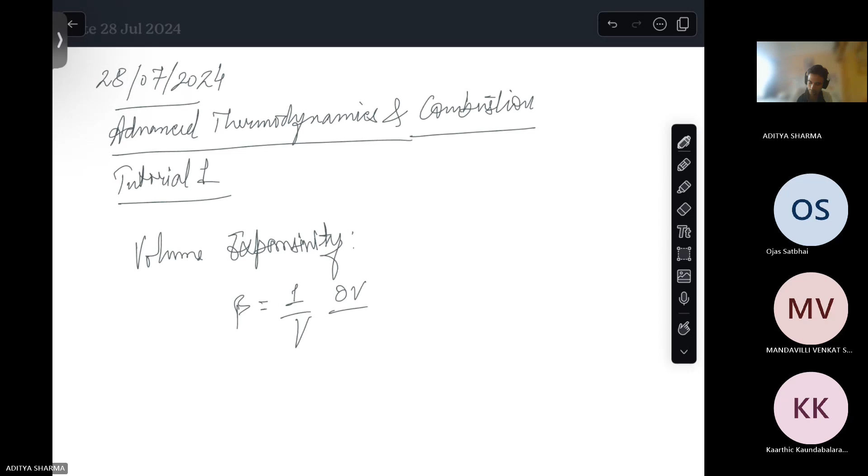Then along with the hydrostatic system, we discussed a few other topics like what is volume expansivity. The numerical formula for volume expansivity relates to, at constant pressure, the change in volume with the change in temperature.

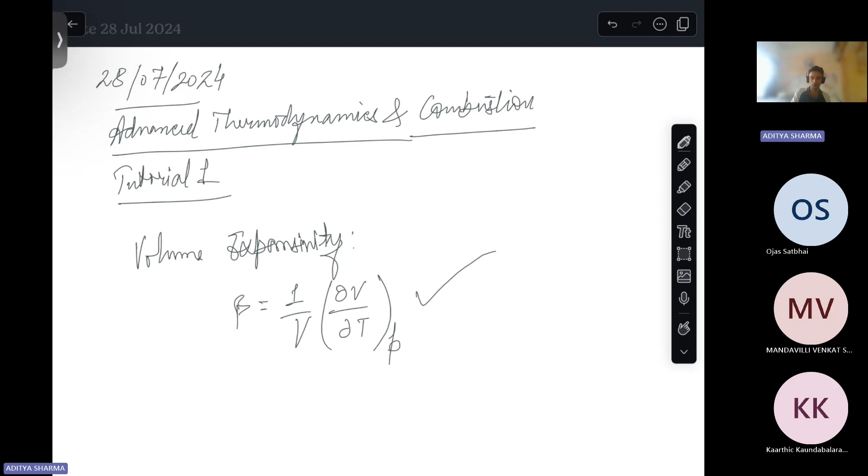So this is the formula for volume expansivity. Then there is isothermal bulk modulus and isothermal compressibility. All this has been discussed, but I'll just write down the formula for isothermal bulk modulus.

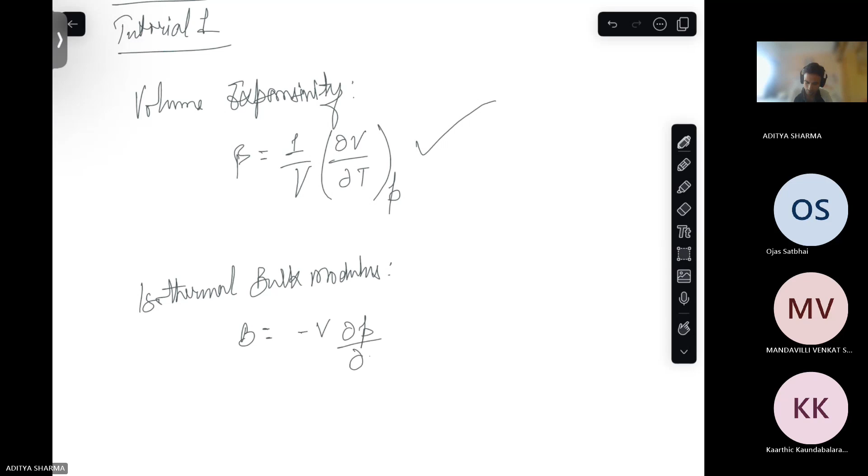And the inverse of this is isothermal compressibility. Conceptually, it has been well discussed in the lecture, so I won't take time on that. But so we have some context of all these topics, I'm just briefly discussing them.

And then there's some relation between volume expansivity and isothermal compressibility. This has been discussed in this particular topic.

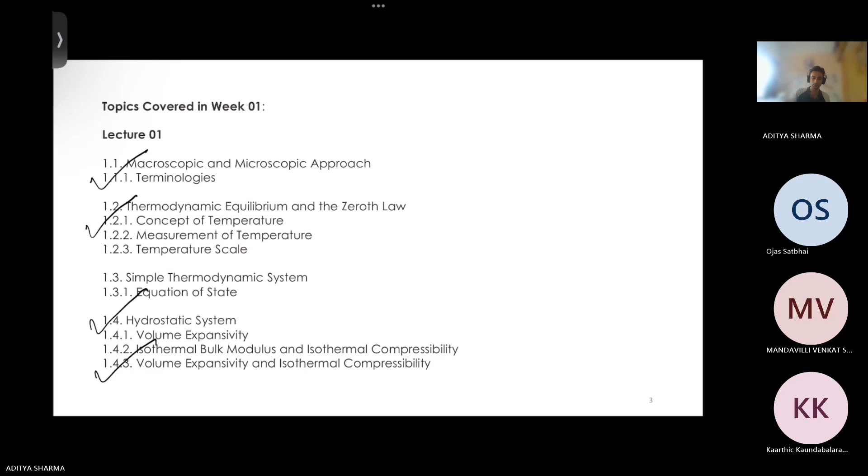So this was about lecture 1, and in lecture 2 we introduced work and heat transfer. What is work and what is heat? This has been discussed and introduced in this lecture.

In the previous lecture, we discussed what a hydrostatic system is, and here we introduced one more term, that is quasi-static. So what is a quasi-static process, and along with that, how we consider work transfer with quasi-static processes. This has been discussed in this topic.

So for a process to be quasi-static, the lectures say that the system has to be in thermodynamic equilibrium. And for thermodynamic equilibrium, it has to be in mechanical equilibrium and chemical equilibrium also. The content of the lecture says this.

Then we saw a pressure volume diagram. So as far as thermodynamics is concerned, PV diagrams are very important. Through PV diagrams, we can discuss the work involved in a particular process, because the area of PV diagrams gives us work.

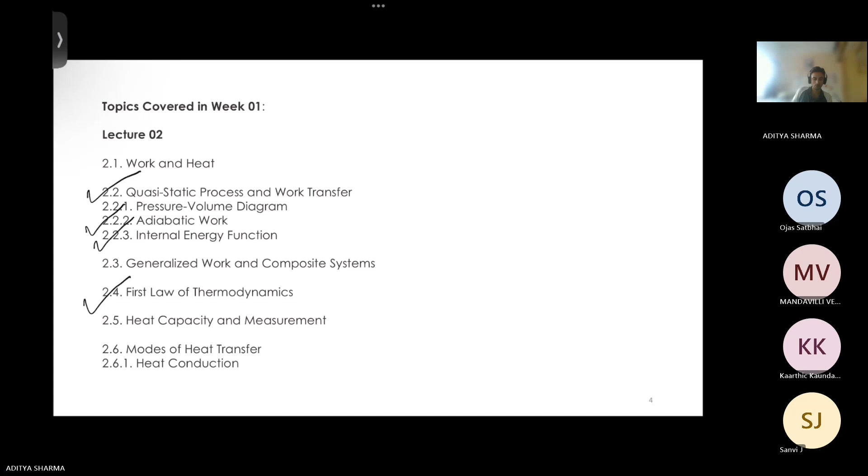As the name suggests, it's the capacity for heat. So if a system is receiving some heat, what is the capacity of that system to gain heat? And that we define using different heat capacities, or should I say two terms: specific heat at constant pressure and specific heat at constant volume. So these heat capacities have been discussed.

And then at the end of this lecture, modes of heat transfer have been discussed - three modes of heat transfer. One is conduction, then there is convection, after that there is radiation. So these three modes of heat transfer have been discussed.

Heat conduction is governed by Fourier's law, and then we have heat convection, and then at the end we have radiation, in which Kirchhoff's law and Stefan-Boltzmann law, these two laws have been discussed and introduced. So this is about lecture two.

Then we have the last lecture of this particular week. So here we started with the conversion of heat and work. How heat can be converted into work and work can be converted into heat is the whole theme of this particular lecture.

In the starting slides, we saw that how work can be purely converted into heat, but vice versa is not possible. And then for that, we introduced the second law of thermodynamics. The statements of second law of thermodynamics state that if we want to get work out of heat, then it is not possible to convert 100% of heat into work.

So for heat engines, there is a Kelvin-Planck statement, and then for refrigerators, there is a Clausius statement. All these statements we have studied in plus one and plus two standard also. And then after these statements, there are inferences out of these statements that have been discussed in this particular lecture.

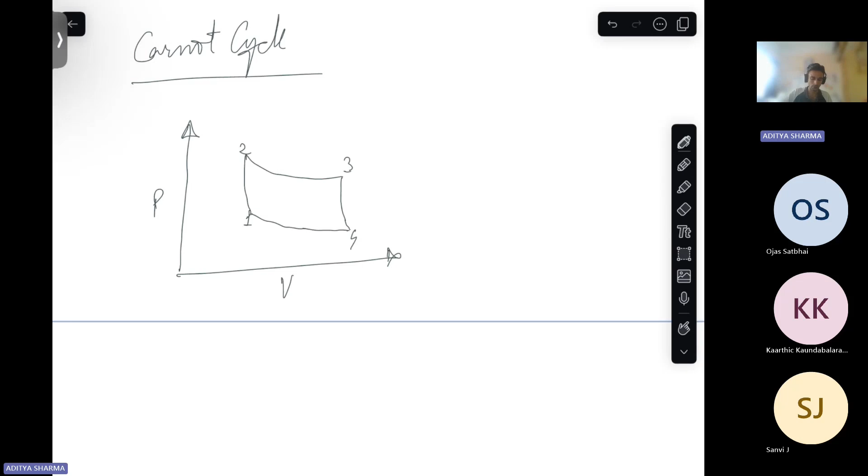So this is our Carnot cycle, right? So in this, 1 to 2 is adiabatic compression. Then this is isothermal heat addition. Then this is also adiabatic expansion, and here is isothermal heat rejection, 4 to 1. So this is our basic Carnot cycle.

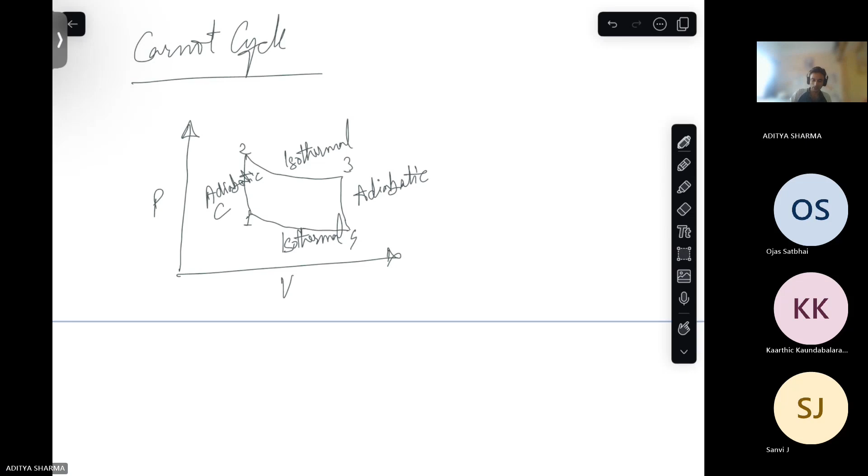So we have discussed this in this particular topic of Carnot cycle. After that, we move on to the next topic, that is thermodynamic temperature scale. So here, what we see is that in the zeroth law of thermodynamics, we introduce the concept of temperature. But there we were not quantifying the temperature, though we discussed how temperature is measured and the different scales. But as far as the quantitative element of temperature is concerned, this comes from the second law of thermodynamics, as the content of your lecture 3 also says.

So here, when we discuss Carnot efficiency, we see that the Carnot efficiency essentially depends on temperature only. And from that, we come into this quantitative part of temperature, and this way we define thermodynamic temperature scale. And then there are different temperature scales, as we all know, some very basic and common, like Celsius, Fahrenheit, Rankine, and one more is there, Kelvin. So all this has been discussed in this particular week.

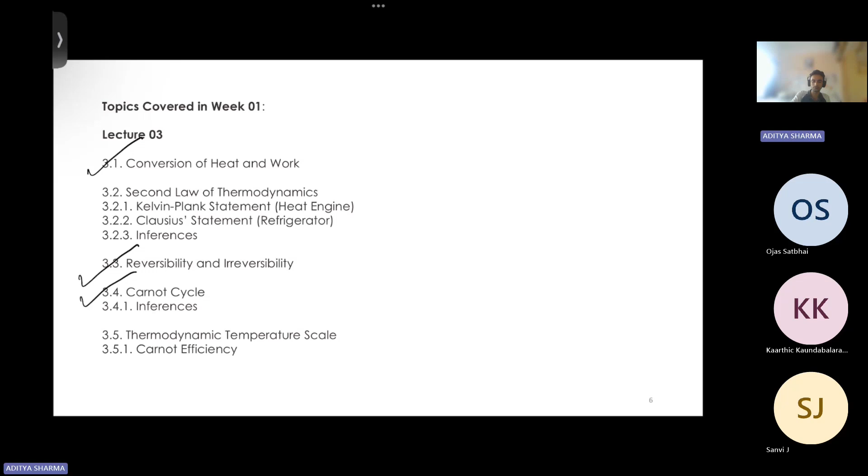So what I do is, along with the question, I also mention the topic from where this particular question comes, and then we discuss the question as far as possible. So first question is on macroscopic and microscopic approach. These are some questions that will be very straightforward and basic, but the idea is also to revise the content covered in the lectures. Along with that, you might also find some questions that you feel are good questions. And at the end, there are numerical questions on the same line as given in your assignments, so that will prove handy to solve your assignments. I have a couple of conceptual questions, but if time doesn't allow, we will skip some and do our numerical questions in the last 20 minutes. We have three numerical questions, but conceptual questions are a lot, so we will see how it goes.

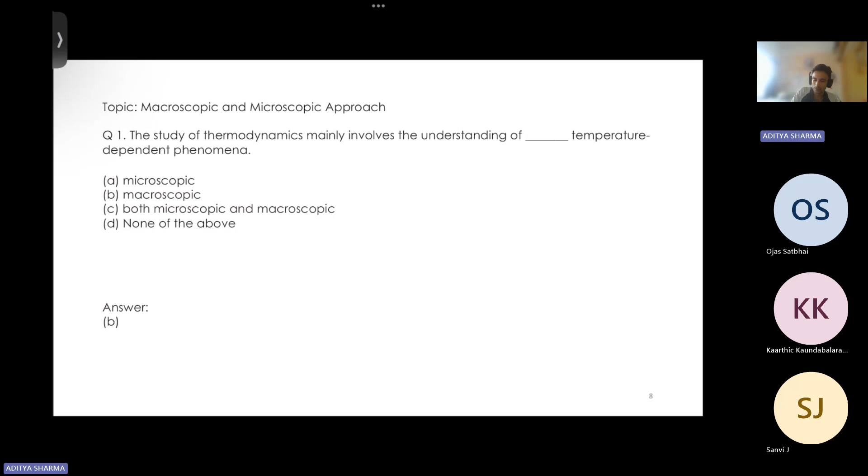Yes, any answer please? Otherwise, I'll discuss this question. Okay, Sanvi says false.

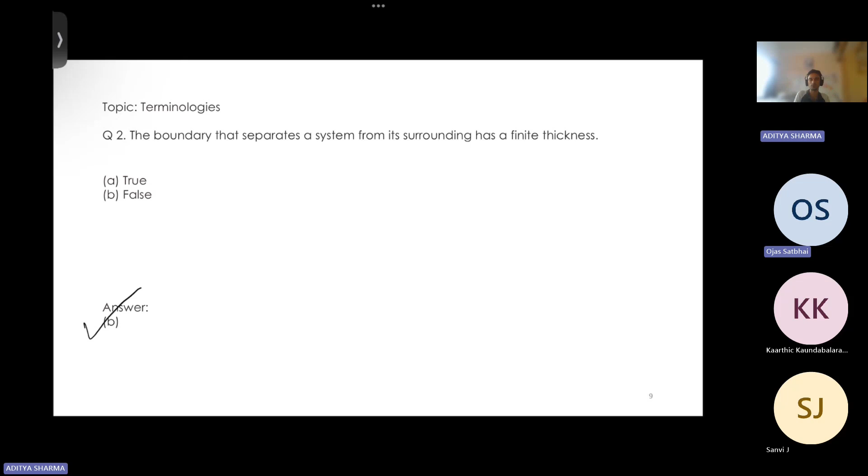Yes, I admire your suggestion, and I also respect it. You have told that you are a teacher, and I keep very high regard for you, sir. But the scheme under which I am conducting these tutorials, I also have to record these sessions, so logistically I believe that may be too much for me to float a form. Aditya, it's fine, perfectly fine, you can carry on, it's just a suggestion. Even if it is discussed, that is completely fine due to the logistics issues and our requirements. Since it is on the MS platform, these forms are available, but it is fine, you don't have to give any explanation, it's just a suggestion. I don't intend to criticize or say something, I take it very positively. But this session is also new for me, so for the safer side I'm saying logistically whether it will be feasible. It is not very straightforward, though with MS Forms in the same Teams meeting, forms are freely available, so it should not be a big thing. Right now I'm feeling that since the course suggests it is advanced thermodynamics, many participants are expecting some advanced treatment, but actually this is the first course, first week, so that's why all these questions. Sure, sure, please carry on. Thank you - in the coming weeks, topics on combustion and exergy will all be covered, but I do take your suggestions very positively. If I'm able to do that, I'll surely do that, but in case I'm not able to, it's perfectly fine, no problem, please don't mind. Thank you.

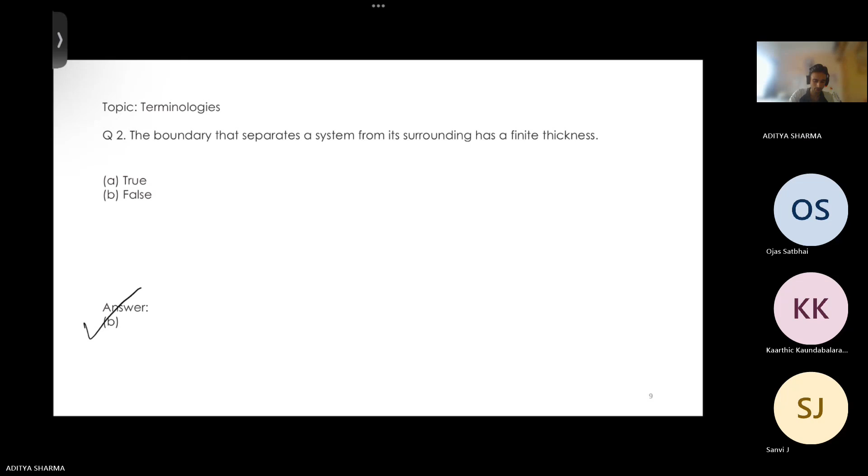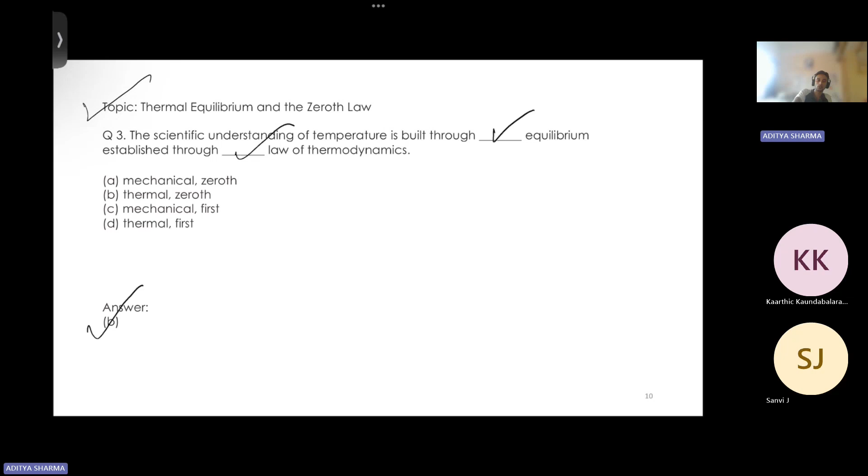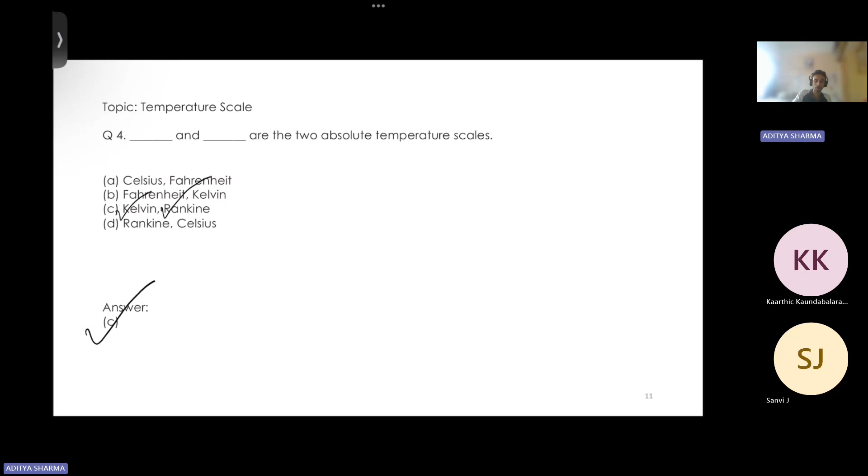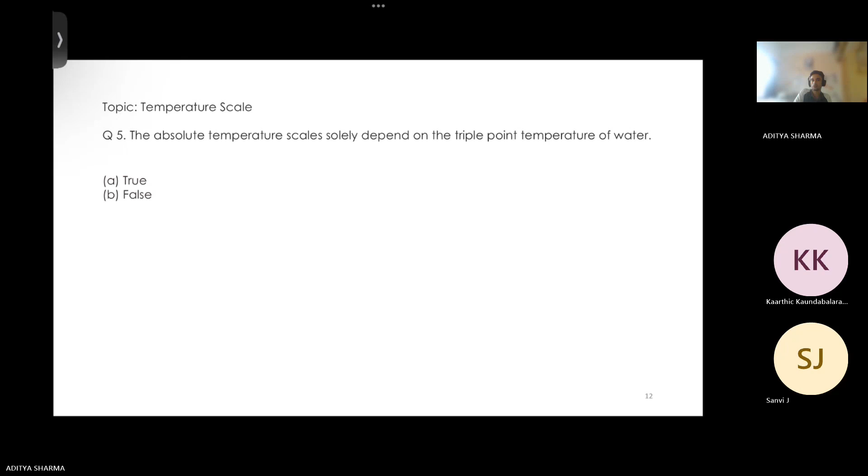If we have to define some absolute scale for temperature, like the Kelvin scale or the Rankine scale, we can do that just through the triple point temperature of water. Through this particular temperature point, we can define our absolute temperature scale. In the case of the Kelvin scale, the triple point is at 273.16 Kelvin, which is 0.01 degrees Celsius. And in the case of Rankine, that is 459.67 degrees R.

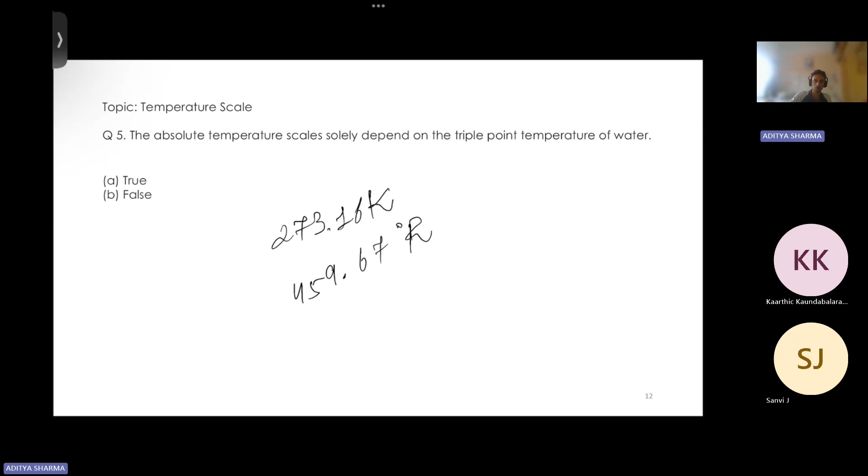So the answer to this question is yes, true.

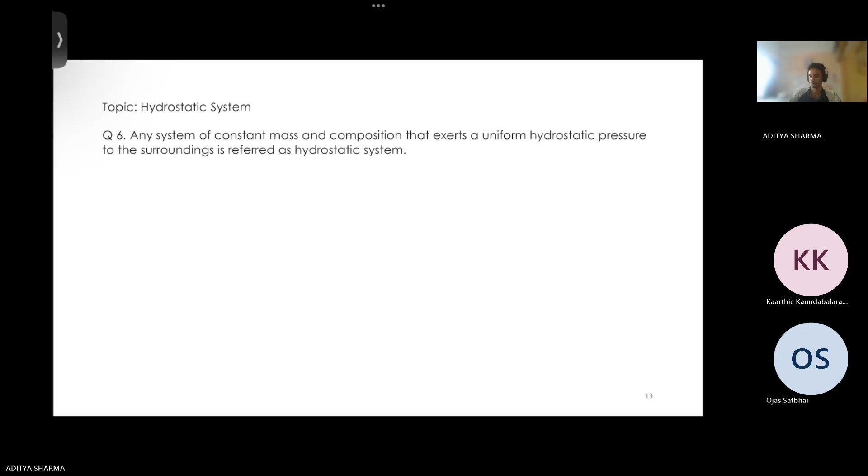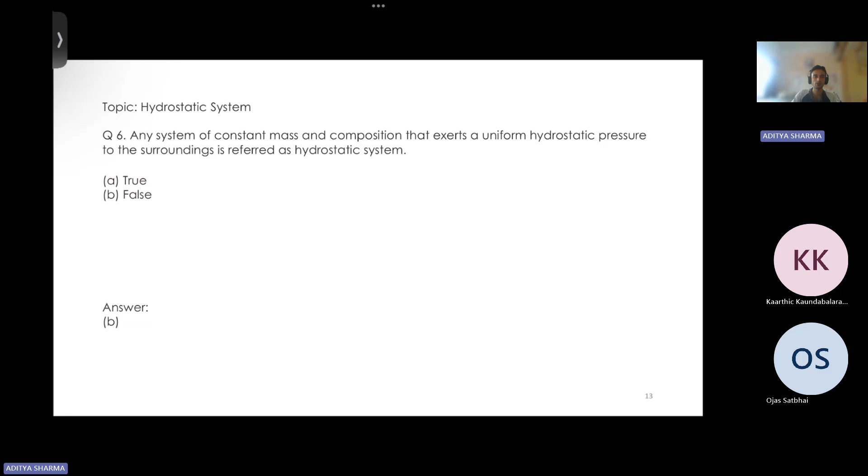So the next question is based on hydrostatic system. The question says that any system of constant mass and composition that exerts uniform hydrostatic pressure to the surroundings is referred to as a hydrostatic system. There is one particular term in this statement that is missing.

So whether this statement is true or false - please try to answer this question.

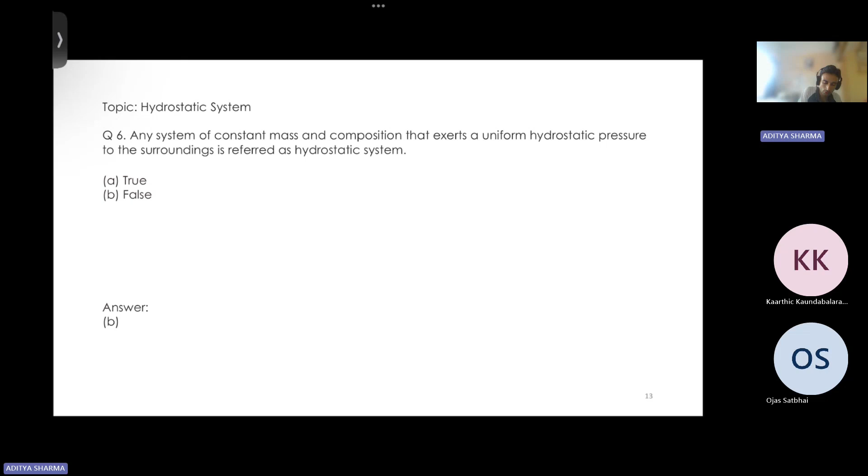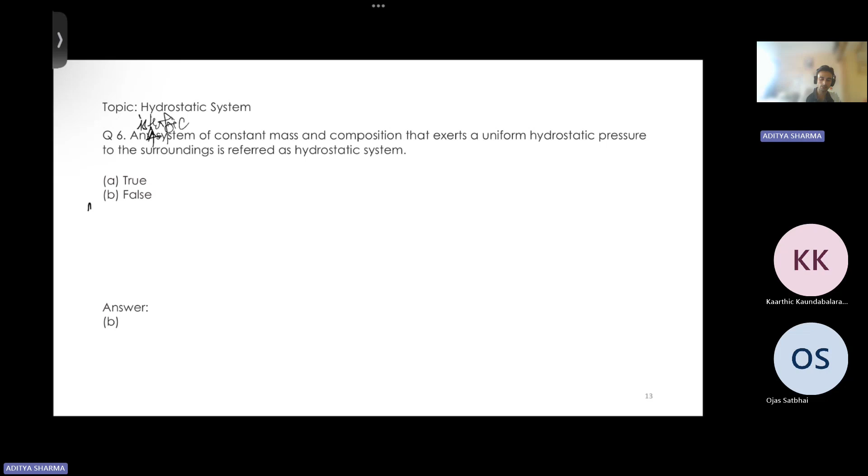Basically, the whole statement is all correct, but then what kind of system has to be there for a system to be hydrostatic? The system needs to be isotropic. Only in that case can we define whether a system is hydrostatic or not. So if that term is missing, we cannot define a hydrostatic system - in that case, this becomes a false statement.

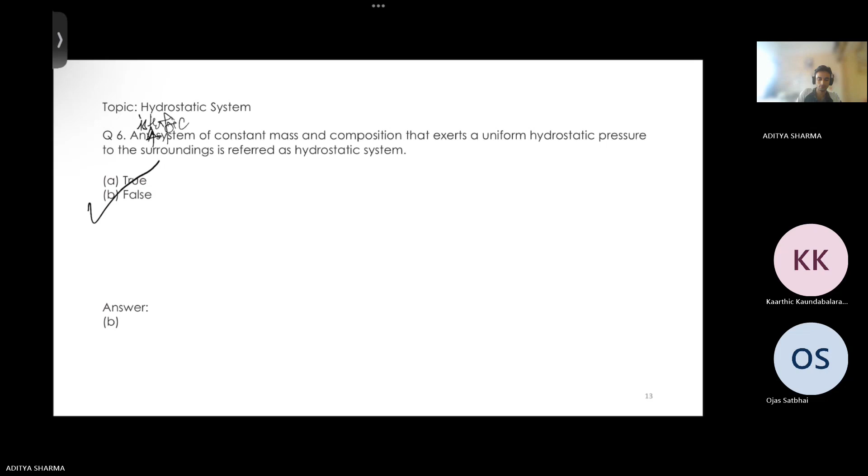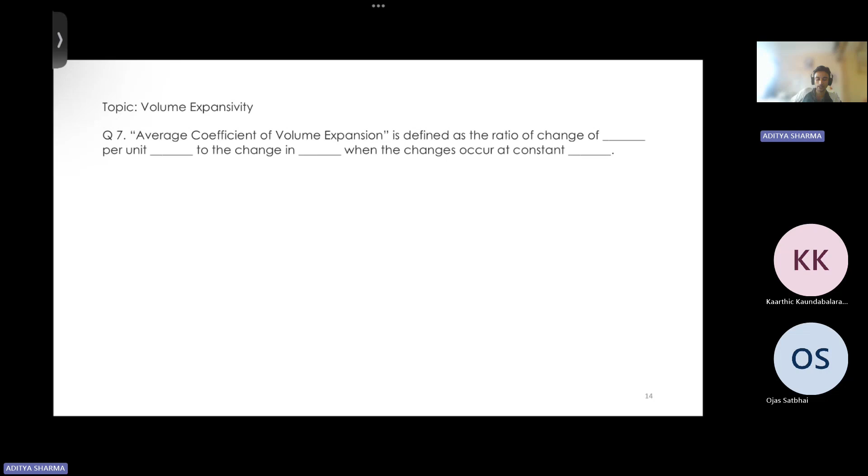Okay, so moving on to next question - this one is on volume expansivity. The question says that the average coefficient of volume expansion is defined as the ratio of change of [blank] per unit [blank] to the change in [blank], when the changes occur at constant [blank]. There are four options - please let me know what will be the answer to this question.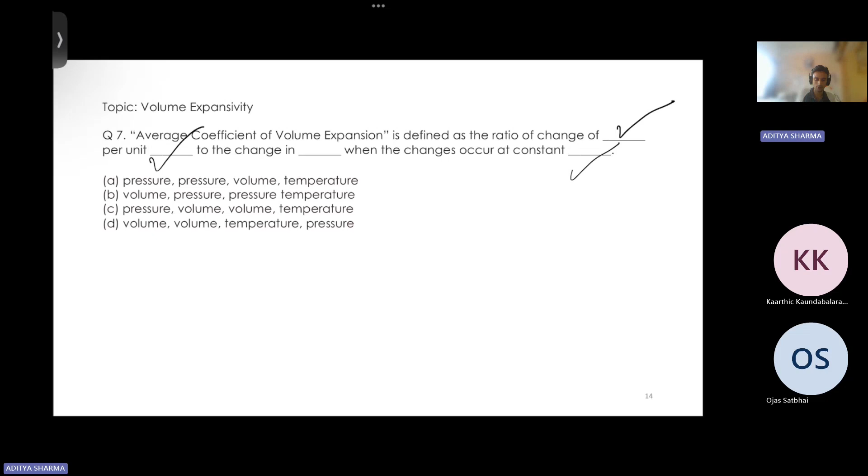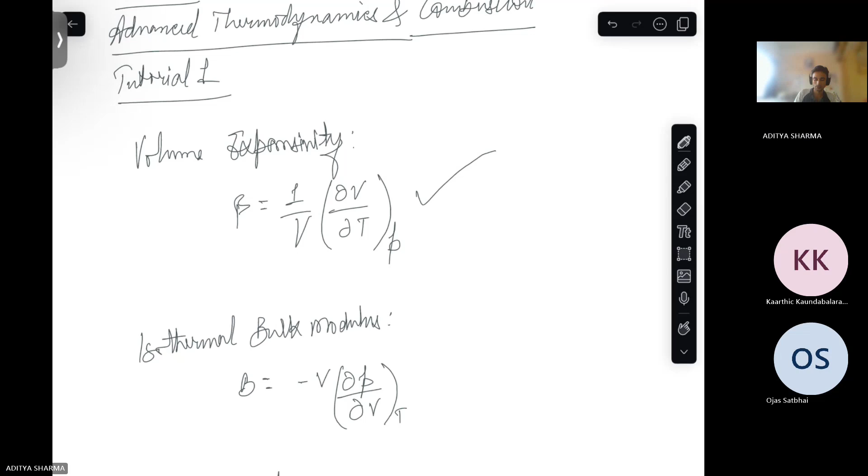Okay, so I have one answer, that is D. This is basically the definition of average coefficient of volume expansion, which we have seen earlier also. So I have written it here - if we see this, there has to be constant pressure involved, and then there is change in volume per unit volume to that change in temperature. If you see this formula, this change in temperature - so D option is correct, right?

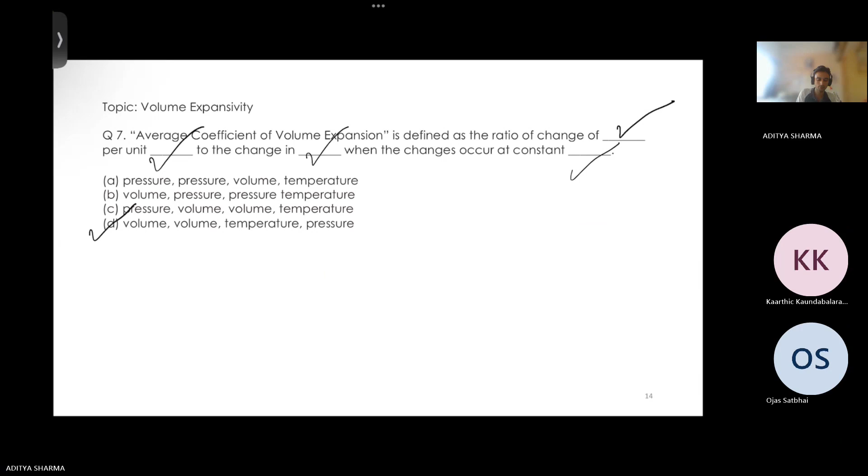All right, so this was our seventh question, moving on to the next question, which was on volume expansivity.

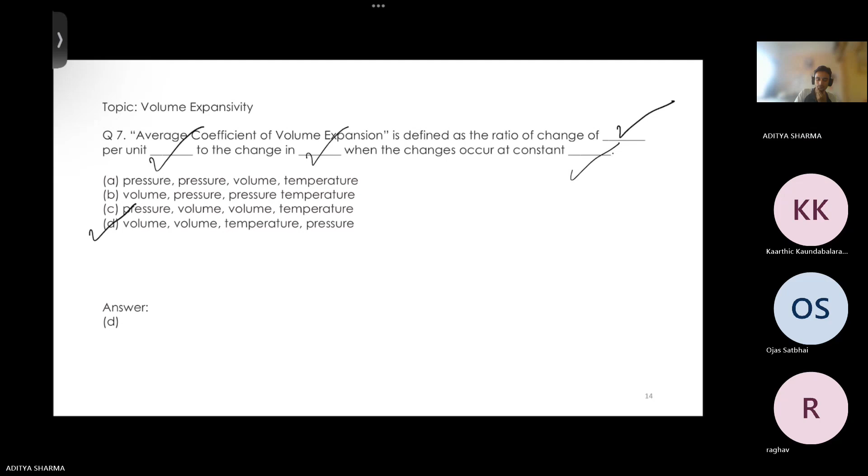So the eighth question again is on volume expansivity, and the question says that the value of average coefficient of volume expansion is always positive. So whether this statement is correct or not.

So this statement is basically false. Why so? Because it's not always the case that with an increase in temperature your volume will increase. This was given in lecture 1, that there is one special case of water between 0 degrees Celsius to 4 degrees Celsius, where if you increase the temperature, there is a decrease in volume. So if the statement says that the average coefficient of volume expansion is always positive, it will be a false statement. So B option is correct.

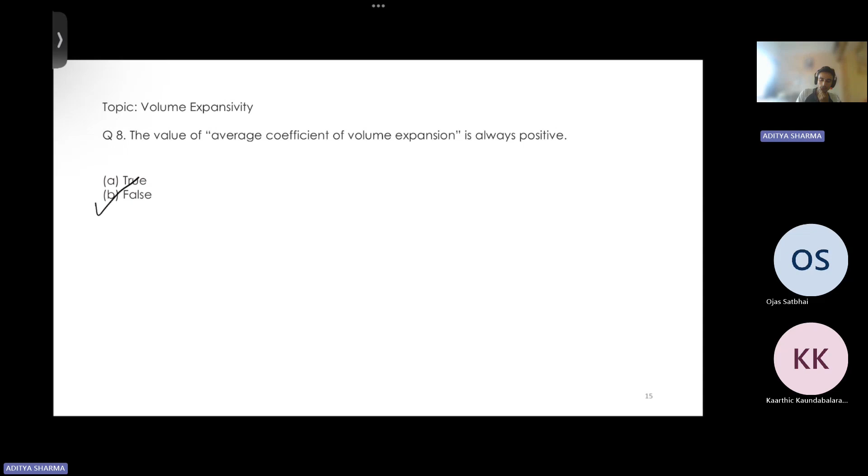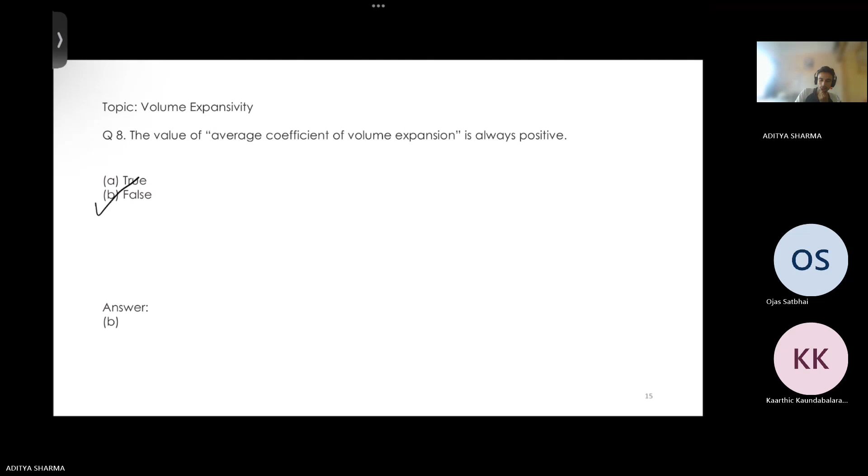So moving on to the next question. The question is on quasi-static process and work transfer topic. This is question number 9, and it says that the ideal way of change of system is quasi-static, for which the system is infinitesimally near the state of thermodynamic equilibrium all the times. So whether this statement is correct or not.

If we know the definition of what a quasi-static process is, this statement should not be any problem. This is basically the definition of quasi-static process only. The ideal way of change of a system is quasi-static. So if a system has to change its state from state 1 to state 2, the ideal way is that it does it by means of a quasi-static process, which essentially has to be in thermodynamic equilibrium all the time. So this statement is true.

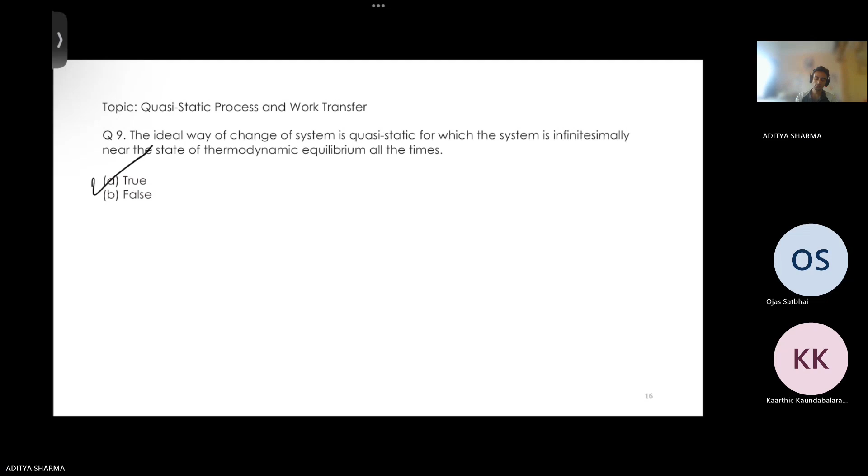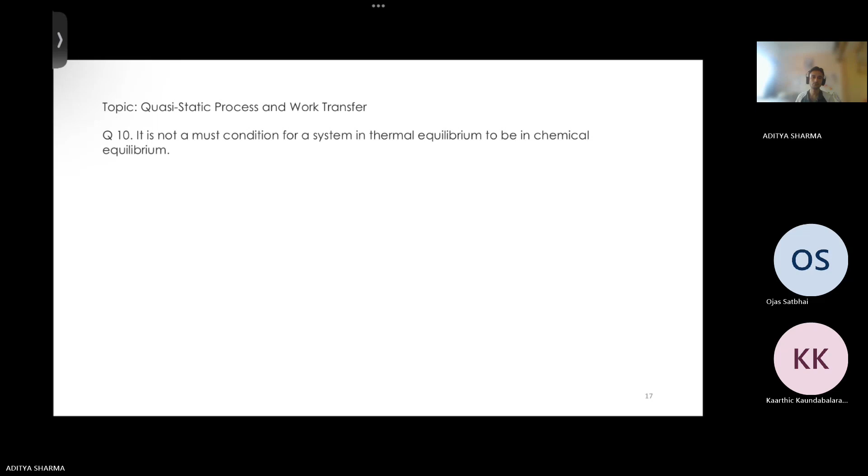So moving on to next question. This is based on quasi-static process and work transfer. The question says that it is not a must condition for a system in thermal equilibrium to be in chemical equilibrium. Whether this statement is correct or false.

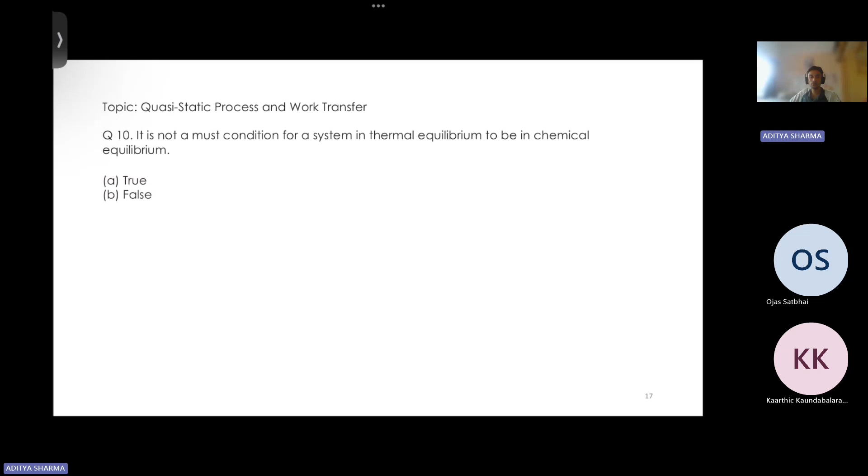Ojas sir says that this is a false statement. This is a false statement because for a system to be in thermodynamic equilibrium, first it has to be in mechanical equilibrium, then it has to be in chemical equilibrium. Then only it qualifies to be in thermal equilibrium. So this statement is a false statement.

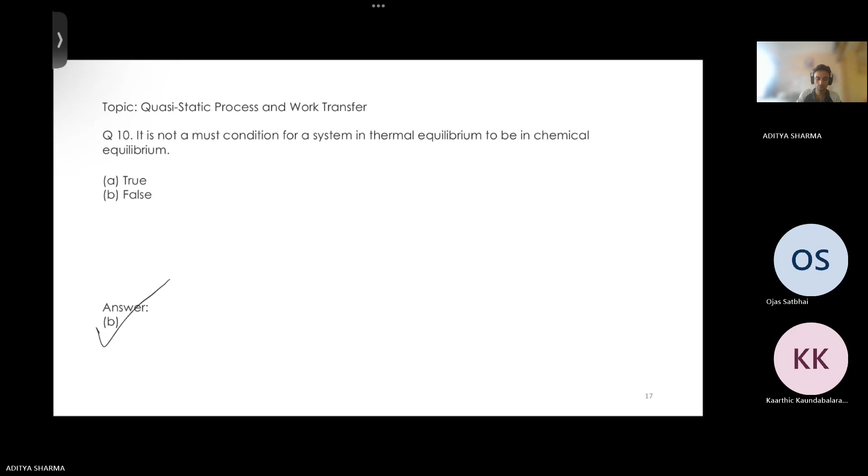Then the next question is on pressure volume diagram, question number 11. It says that the hydrostatic work is independent of path. Whether this statement is correct or not.

So I have one answer that is false. If we talk about the hydrostatic work, it is path dependent. Even if we see our PV diagram, and through that if we try to find our work, we'll have to integrate, and if we integrate this PdV, the P term is path dependent. The way P behaves in the PV diagram defines how the hydrostatic work would be. So if the statement says that the hydrostatic work is independent of path, it will be a false statement. So this is a false statement.

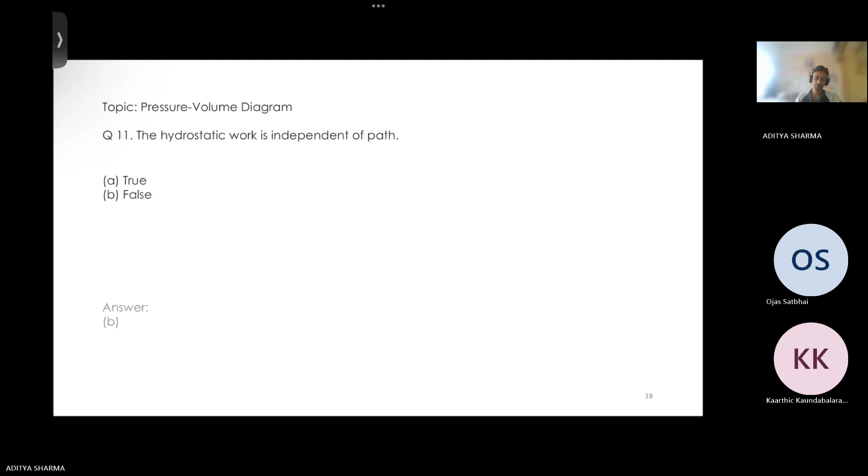All right, so it's 450, 440. So in the last maybe 15 minutes, I'll take numericals. About this also, I know the definition of hydrostatic system, and from that context only the hydrostatic work I have put it here, and this you can find in the content of lecture 2 of this particular course.

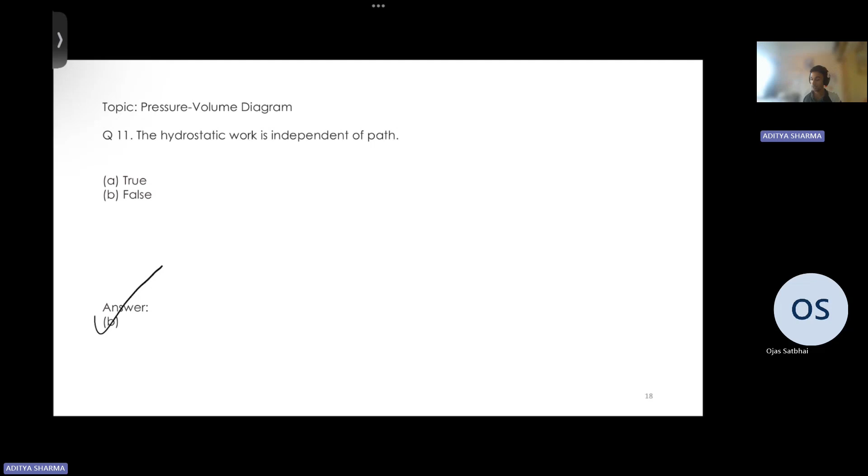And because you have said you want some example on that, I'll also look into that. So, this hydrostatic work, is it same as flow work? Whether hydrostatic work is same as flow work, this is what you said. Yes, yes. Sorry, I won't be able to answer that. Okay, but I'll go through the example of hydrostatic system and let you know. There is another query you had on internally and externally reversibilities, from there also you want some example, right? So I'll also look into that.

So moving on to next question. Next question is on adiabatic work. There are paths by which a system can change from an initial state to the final state by performance of adiabatic work only. This question is about the paths that a particular process takes to move from one particular state to some other state while remaining adiabatic. Whether it can be done through some particular path only, or whether there are some other paths also through which this can be attained. So this is what the question asks. So yes, what will be the answer to this question?

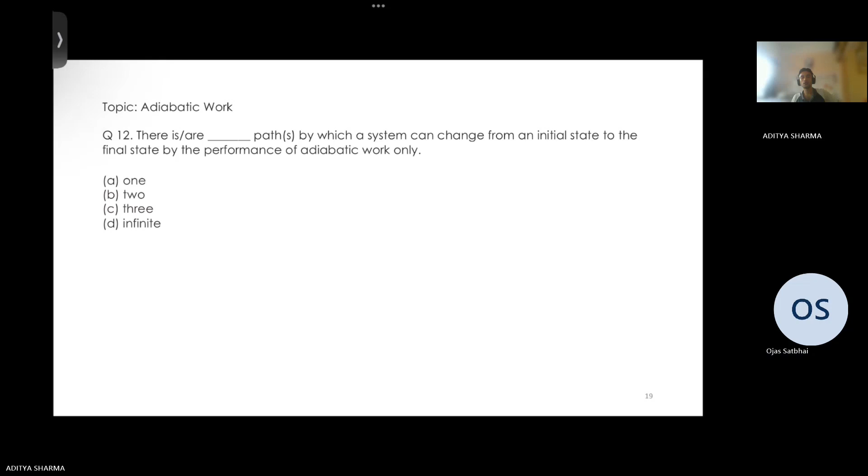So any path it takes, the work depends on the initial and final state in case of adiabatic work. Any form of work is generally a path function. But if the work is adiabatic, in that case it won't be the same.

Can you elaborate? Mostly forms of work - let's say there is a VdP kind of work and PdV kind of work, and flow work, which will also get accumulated in PdV. So these two works, in general, are how we define any thermodynamic work.

Ultimately if we are able to raise a dead weight using a pulley and rope arrangement, then we can categorize that as work. I think the question is suggesting that the work which was calculated or demonstrated when the adiabatic process was enforced - yes, that is the point.

But in any process, whether it's adiabatic or isentropic, work will be a path function. So I think it should be infinite paths - yes, that is the answer.

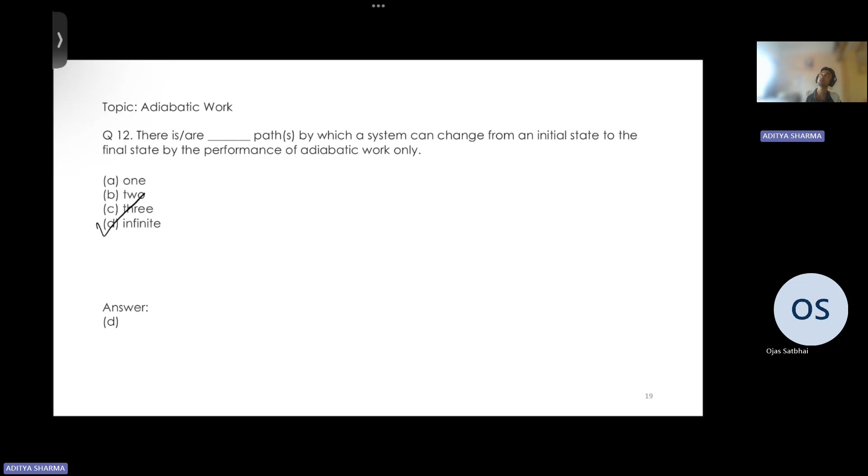I believe now we are left with maybe 12 minutes, so maybe one more question we can take after that. We will do numericals.

So the question is based on the first law of thermodynamics, on sign convention. Generally there remains a confusion on sign convention of heat and work when we are studying thermodynamics. From that perspective, I have placed this question and the next question in this tutorial.

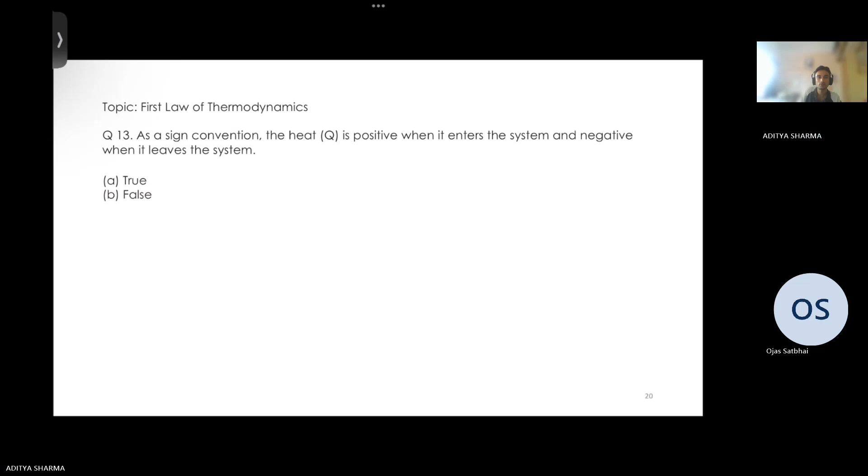This question says that as a sign convention, heat is positive when it enters the system and negative when it leaves the system. Whether this statement is correct or not - I'll answer this as we are short of time. This is a correct statement.

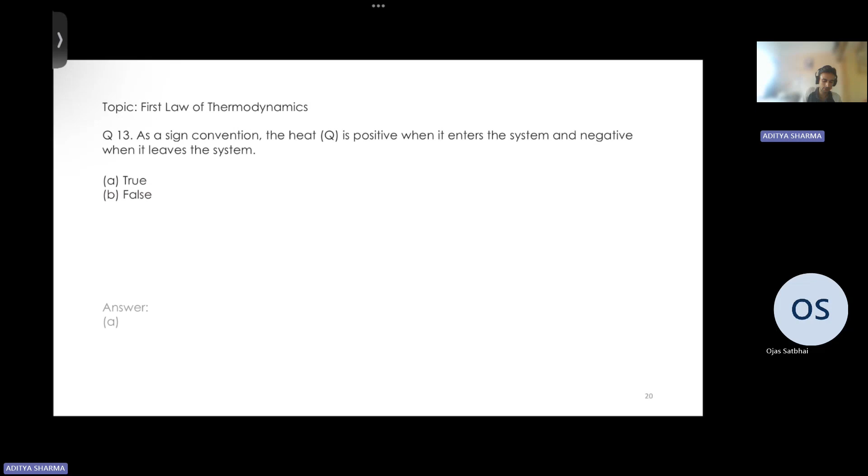And with this, I'll go through the next question also because that is linked to the previous one. As a sign convention, the work done is negative when it leaves the system and is positive when it enters the system - whether this sign convention has been correctly placed here.

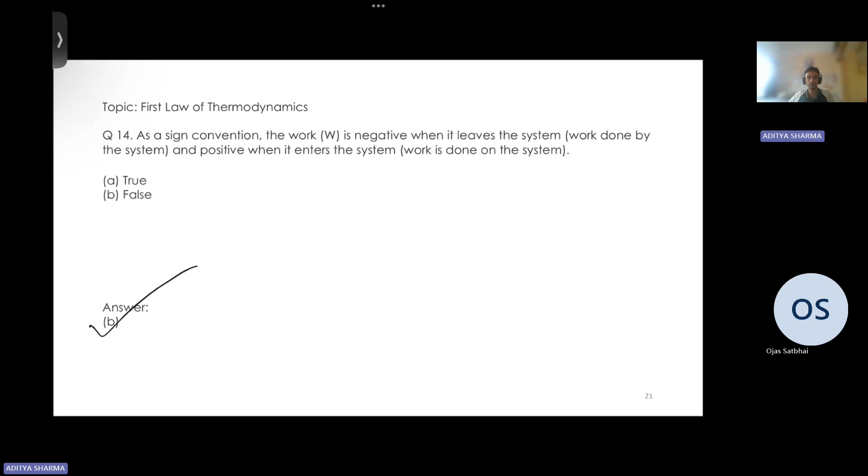This is not a correct statement. When work is leaving the system, in that case it will be positive, and in case work is done on the system, then it will be negative. So this is the sign convention related to work and heat.

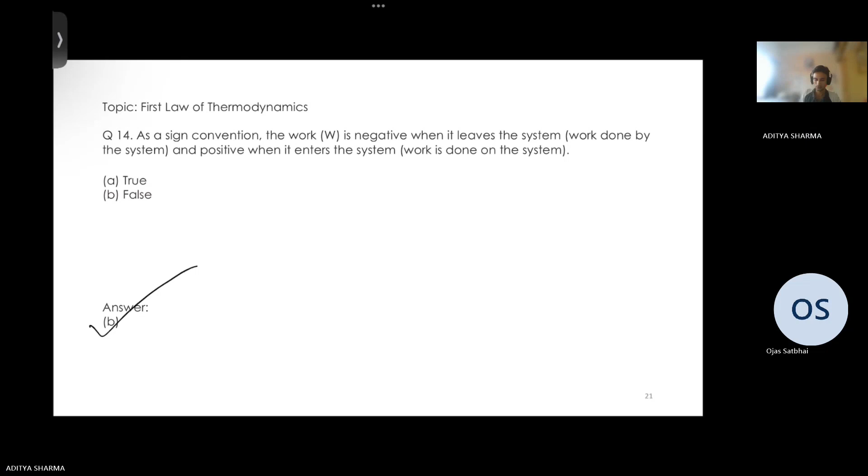Still we have some time, but then we will see the numerical questions. There are three questions only, so it's not a big thing, but yes, let's see.

Right, so now we are into our numerical questions. There are three numerical questions that we'll be discussing from here onwards.

Okay, so this question is on conversion of heat and work, covered under that topic in lecture 3.

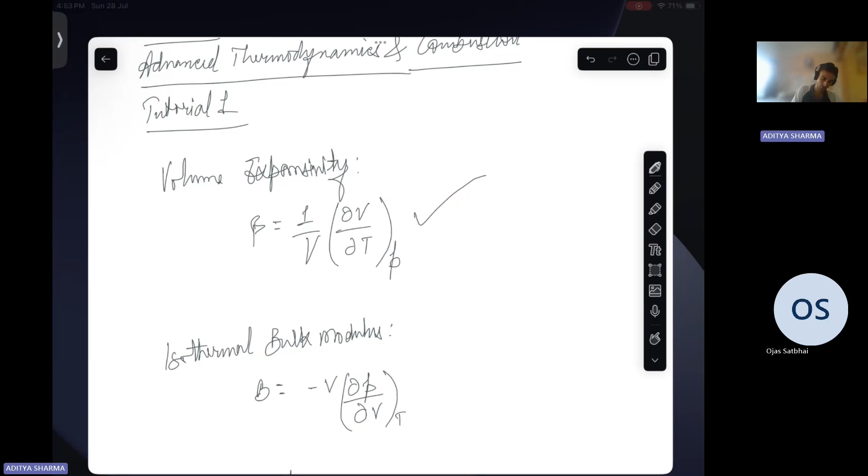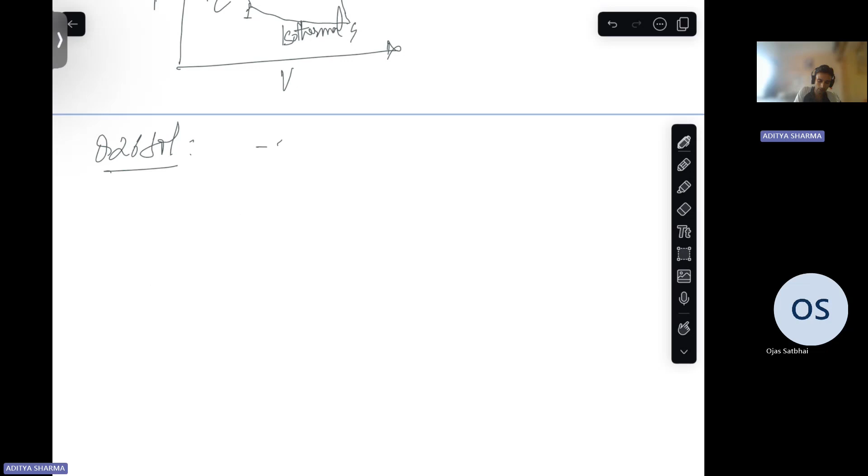The question asks: what is the coefficient of performance of a refrigerator that operates with Carnot efficiency between temperatures of minus 10 degree Celsius and 40 degree Celsius? So we have two temperatures, minus 10 degrees Celsius and 40 degrees Celsius. To use these in our numerical, first we'll convert them into Kelvin.

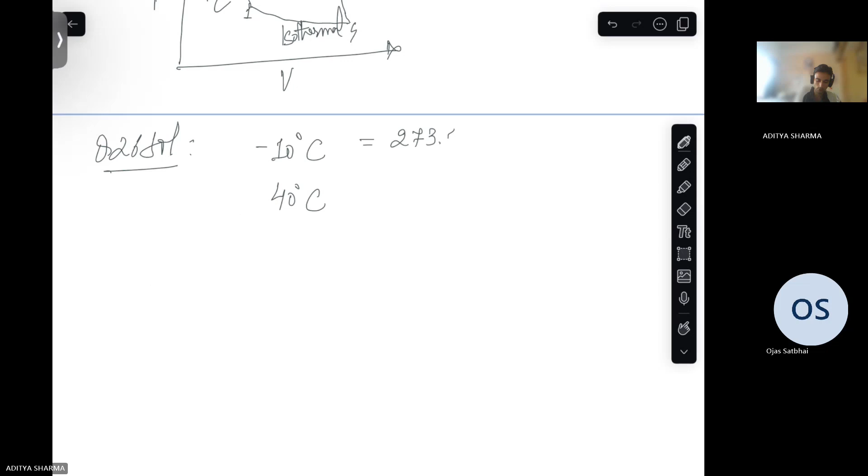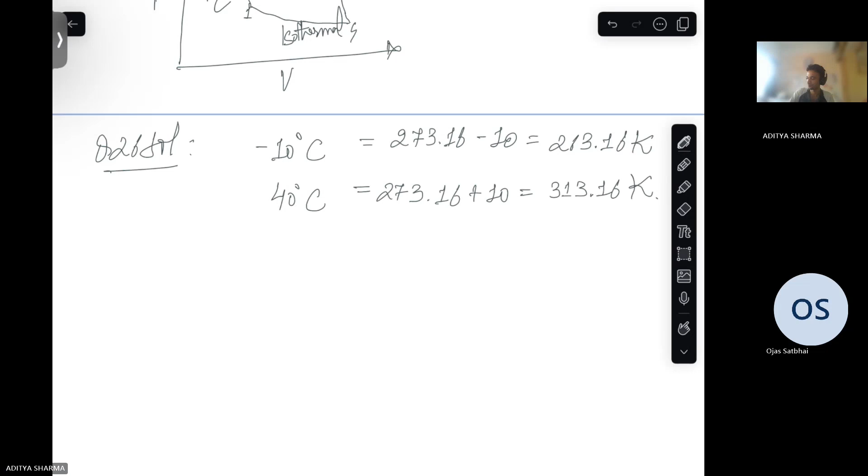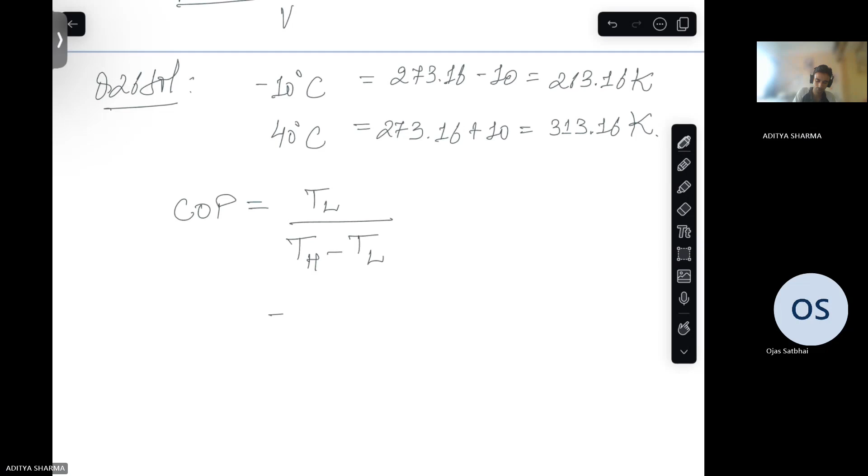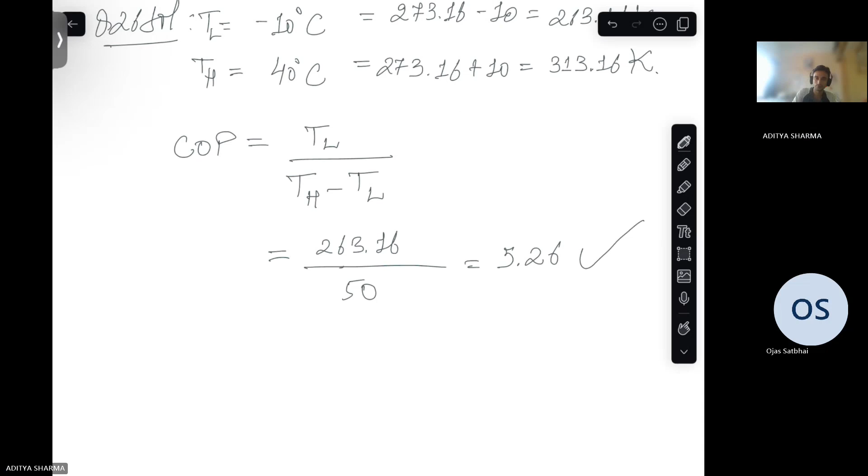So minus 10 degree Celsius becomes 263.16 Kelvin, and 40 degree Celsius becomes the other temperature. Now that we have these two temperatures, we will find COP, which is temperature low divided by temperature high minus temperature low. Temperature low here is 263.16, and temperature high minus temperature low is 50. So this is our temperature low and this is our temperature high, and this comes out to be 5.26. So this is our COP.

So this was question number 26. The coefficient of performance of the refrigerator will be 5.26.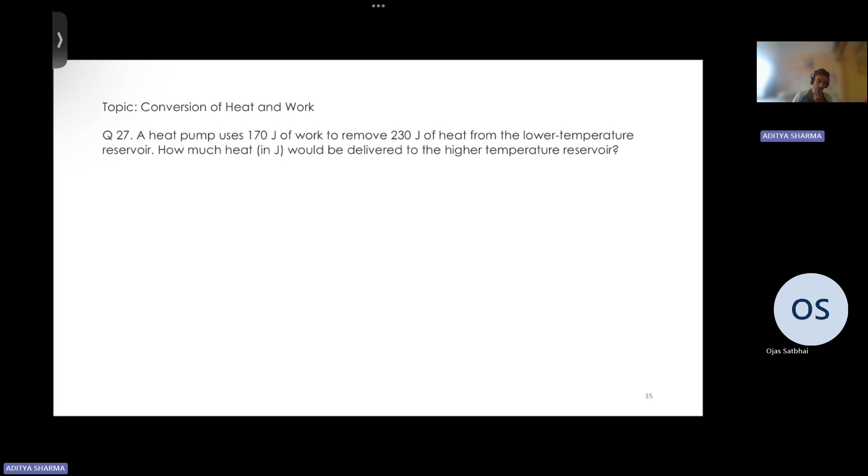Moving on to the next question, also on conversion of heat and work. A heat pump uses 170 joule of work to remove 230 joule of heat from the lower temperature reservoir. So 230 joule of heat is to be rejected, and to reject that amount of heat from the low temperature reservoir, a work of 170 joule is being done. In that case, how much heat in joules would be delivered to the high temperature reservoir?

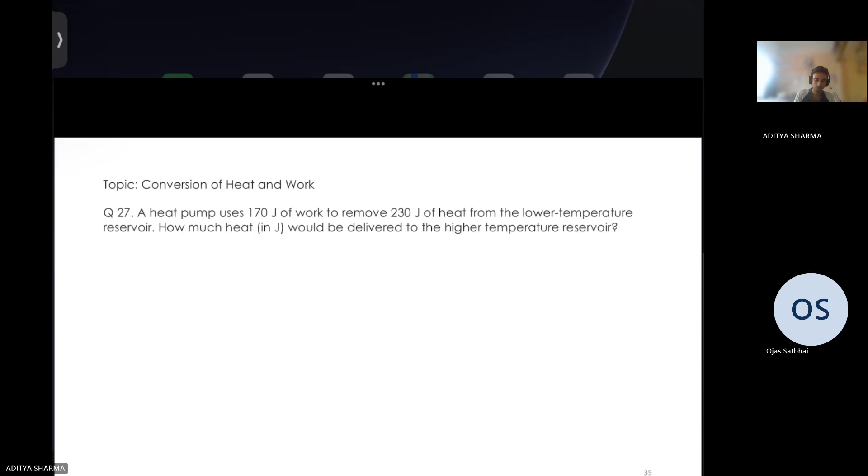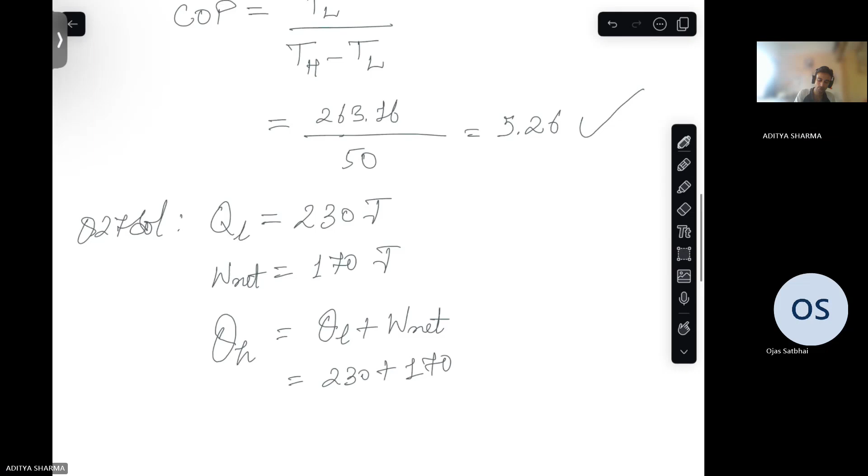Using the nomenclature from the lectures, the heat that is to be rejected is QL, and the work being done is 170 joules. The total heat that will go to the high temperature reservoir will be equal to QL plus W net, which gives 230 plus 170. So 400 joules will be the answer to this question.

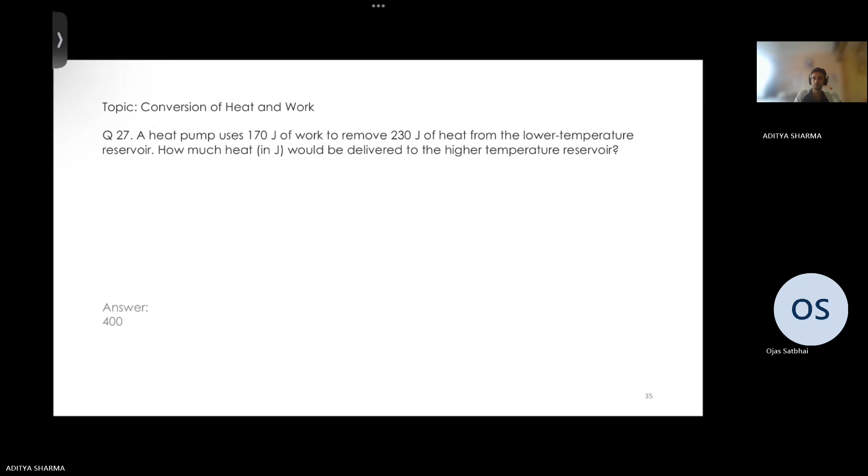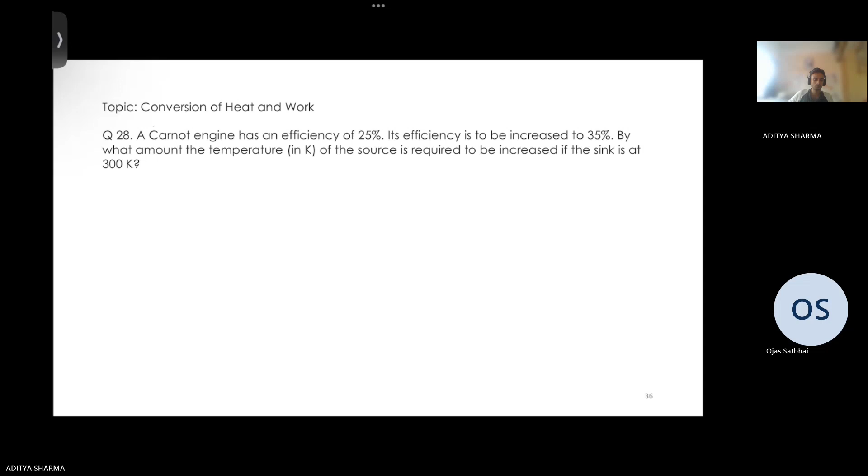Moving on to the next and last question for this tutorial session, again on conversion of heat and work. It's already 5 p.m., so we'll quickly do this and then conclude today's session. The question says a Carnot engine has an efficiency of 25% and its efficiency is to be increased to 35%. By what amount does the temperature in Kelvin of the source need to be increased, if the sink is at 300 Kelvin? So the sink where heat is being rejected is at 300 Kelvin, and different efficiencies are given, and they ask for the increase in temperature at the source if efficiency goes from 25% to 35%.

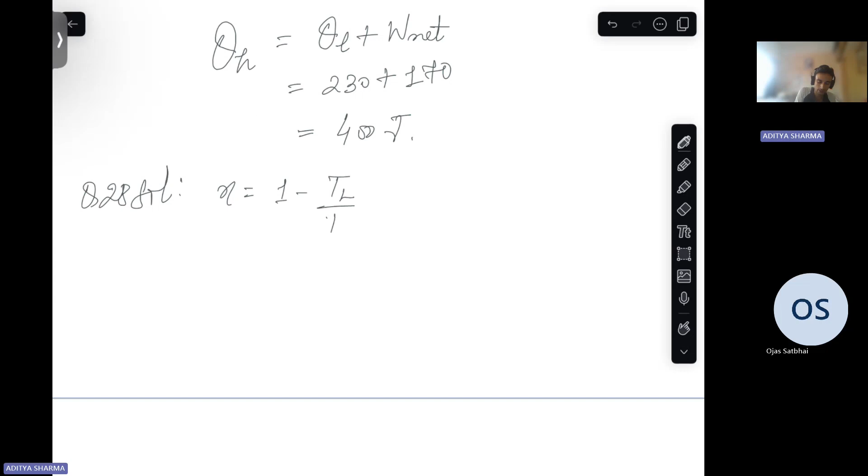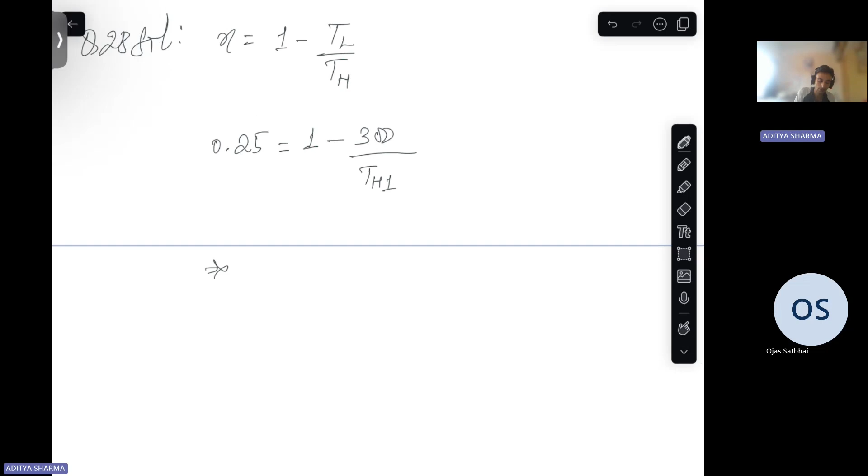Efficiency is 1 minus T low by T high. So for 0.25 efficiency, let's say the temperature at the source is TH1, and T low is 300 Kelvin. So 300 by TH1 equals 0.75, which implies TH1 equals 300 by 0.75, which comes out to be 400 Kelvin.

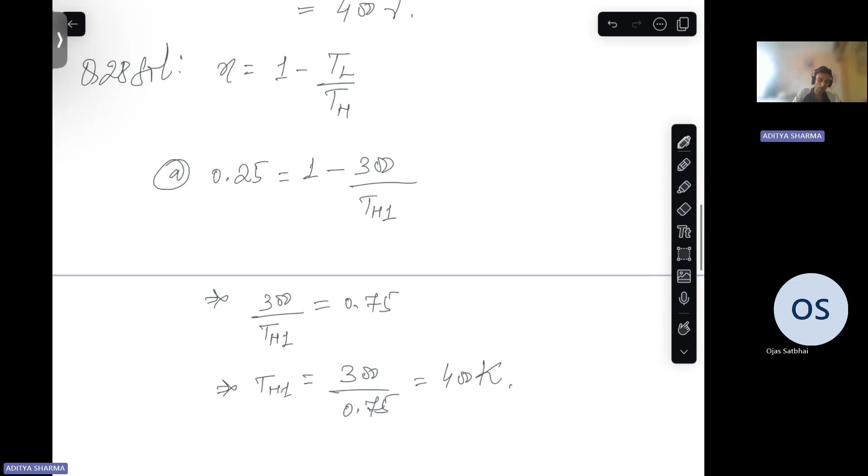Then for the second case, when efficiency is 0.35, we will write the temperature at source as TH2, and this comes out to be 461.53 Kelvin. So the temperature has to be increased from 400 Kelvin to 461.53 Kelvin, in case the efficiency of this Carnot engine is increased from 0.25 to 0.35.

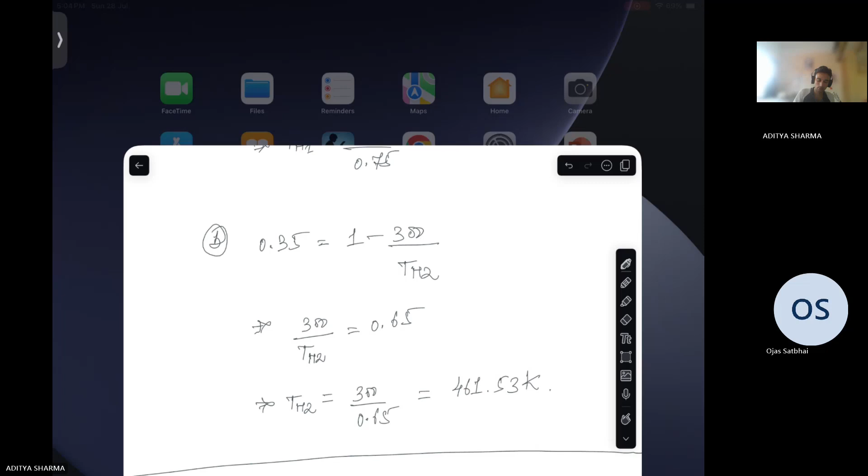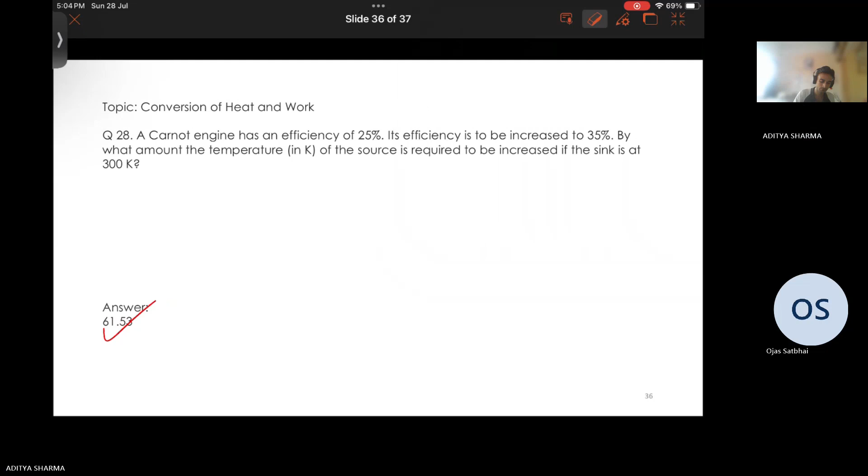So this was it. I'll conclude now this session.

In the starting, we discussed the three lectures, lecture 1, 2, and 3, and briefly covered the topics discussed in week 1. After that, we moved on to conceptual questions, discussing a few from lecture 1 and lecture 2, though some questions from the prepared tutorial are still left.